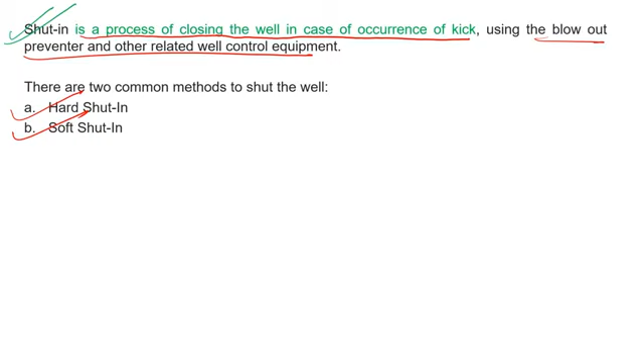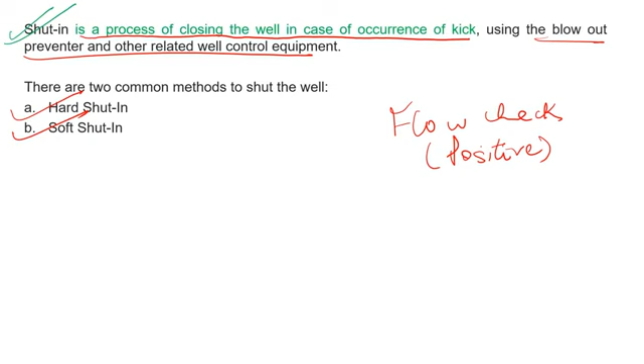There are two common methods to shut the well: hard shut-in and soft shut-in. Once confirmed by a flow check, if my flow check is positive, then I should go for a shut-in. Whether to go for a hard shut-in or a soft shut-in depends on the company's policy and the API specifications.

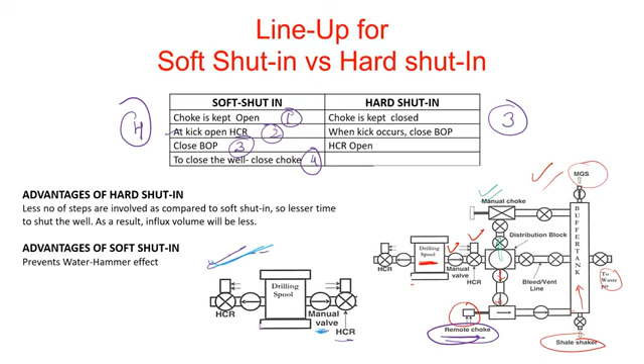Now coming to hard shut-in. The very first point is we have to keep the remote choke closed. Second, when the kick occurs, that is when the well has taken the kick, we close the BOP. Third, after closing the BOP, we need to open the HCR valve. So these are the 3 procedures involved in hard shut-in.

Now, advantages of hard shut-in: as you can see, in hard shut-in I have 3 steps involved, and in my soft shut-in I have 4 steps.

Less number of steps are involved as compared to soft shut-in, so lesser time to shut the well. As a result, influx volume will be less. If I am taking more amount of time to close the well, the influx can enter more into the wellbore, which can result in devastation.

So it is always recommended that I shut the well as soon as possible. If I'm going for a hard shut-in, the overall time taken for the shut-in procedure would be less as compared to that of a soft shut-in.

Now coming to the advantages of soft shut-in: it prevents the water hammer effect. One of the disadvantages of hard shut-in is that there is a high amount of water hammer effect, but in soft shut-in we can prevent that particular water hammer. So that's about the lineup for soft shut-in versus hard shut-in.

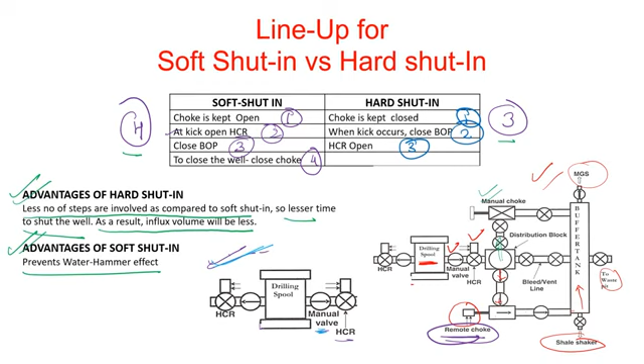Again, it depends on the company whether to go for a soft shut-in or a hard shut-in. Each and every company will have their different SOPs.

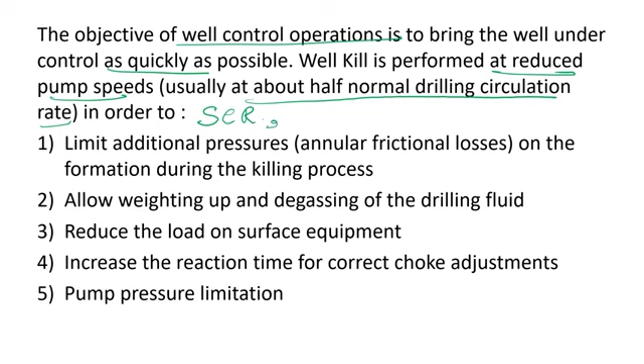Now coming to well killing: the objective of well control operations is to bring the well under control as quickly as possible. A well kill is performed at reduced pump speeds, usually about half the normal drilling circulation rate. This reduced pump speed is generally known as the slow circulation rate, and the pressure corresponding to that is the kill rate pressure. We will discuss these terms in coming slides.

Now why do we go for an SCR or kill rate pressure? To limit additional pressures, like annular frictional losses on the formation during the kill process. Second, to allow weighting up and degassing of the drilling fluids.

If I'm going for well kill with slow circulation rate, I'm giving enough amount of time for weighting up my drilling fluid, and also enough amount of time to degas. For the process of degassing also we are giving enough amount of time if we are going for a slow circulation rate of well killing.

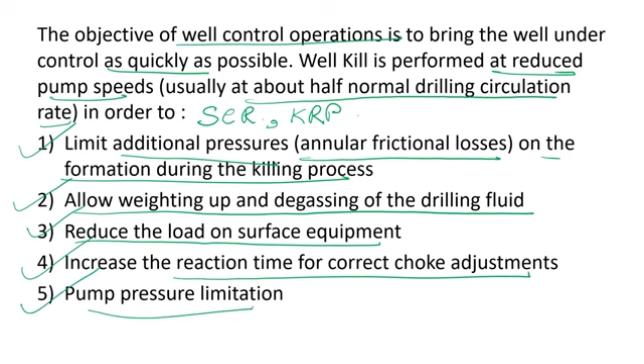Now third point is reduce the load on surface equipment—this is a very important point; by SCR we can achieve reduced load on surface equipment. Fourth point is increase the reaction time for correct choke adjustment. And fifth point is pump pressure limitation. We will discuss these points again in coming slides.

This calculated back pressure is the pressure corresponding to the slow circulation rate, which is also termed as kill rate pressure, or KRP.

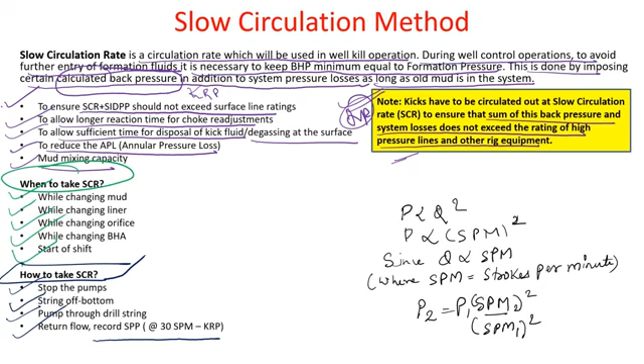So what we do is we first stop the pump and take the string off the bottom. At the off-bottom position I will start the pump and circulate my drilling fluid at 30 SPM, the slow circulation rate. SPM means strokes per minute. So for this particular case, my SCR, slow circulation rate, is 30 SPM.

Once I start my pump, I increase my SPM in steps of 5. I will first run at 5 SPM, then 10, 15, 20, 25 and 30. Till I reach 30, I will increase the strokes per minute of my mud pump, and whatever pressure I'm recording at 30 SPM becomes my kill rate pressure.

Now let's discuss this particular portion. This is a very important portion as far as GATE numericals are considered, so take special note regarding this.

As we know, the mud pump pressure is directly proportional to the flow rate squared. And since the flow rate is directly proportional to the strokes per minute, we can also say that pump pressure is directly proportional to SPM squared, where SPM is strokes per minute. Since pressure upon SPM squared is constant, from that logic we can calculate: P2 equals P1 into SPM2 squared upon SPM1 squared. This is a very important concept for GATE.

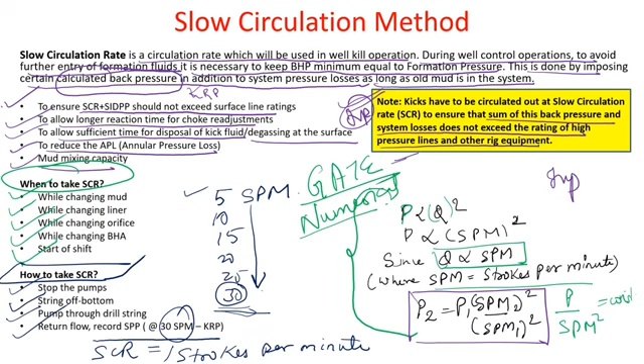Now let's discuss well killing methods. The very first point, whenever we discuss well killing, the principle of well killing is to keep the bottom hole pressure constant, and it should be at least equal to the formation pressure. This is a very crucial point to understand before we talk about well killing.

Now coming to types of well killing, there are basically two types: one is circulating in nature, the second is non-circulating. In circulating we have the driller's method and the wait and weight method, and in non-circulating we have volumetric and bullheading.

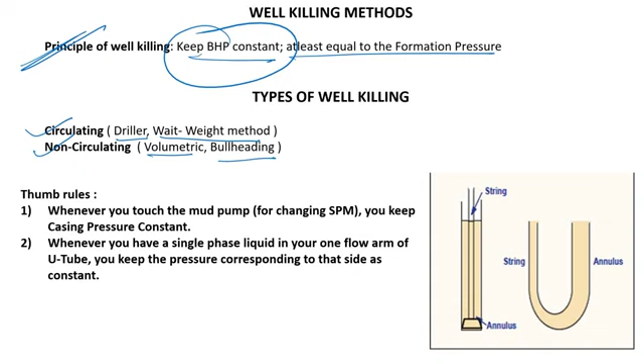Now coming to the thumb rules, again a very crucial point. Whatever thumb rules I discuss, I will use this concept in the coming slides. When I'm discussing driller's method, wait and weight method, and volumetric method, I will use these thumb rules there also. So take special note and please understand at this point.

So the very first thumb rule is: whenever you touch the pump to change your SPM, you keep casing pressure constant. Changing SPM means, as I mentioned, once my pumps are off, to reach the SCR (slow circulation rate), I will increase my strokes per minute of the pump by 5: 5 SPM, 10, 15, 20, 25 and 30 SPM. So basically I am increasing my pump speed.

Whenever I am touching the pump, or trying to increase or decrease the pump speed, at that time I will always consider my string and my annulus as two different arms of a U-tube. The left hand side is the drill string's arm of the U-tube, and the right hand side is the annulus side. The pressure recorded at the annulus side is my SICP, the casing pressure, and the pressure recorded at the string side is my SIDPP, the shut-in drill pipe pressure. Let me repeat it again.

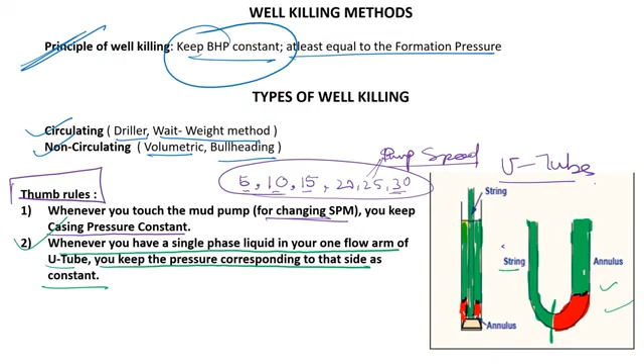Now you can see from this diagram that my drill string side has single phase fluid, but my annulus side of the U-tube has two different fluids: one is the kick, shown in red, and the other is the original drill mud. So two different fluids in my annulus side, but only single phase fluid in my drill string side. Let this be my SIDPP.

So whenever I am having one fluid in one of the arms of my U-tube, I will always keep that side's pressure constant. In this example, I will keep my SIDPP constant, because my string side of the U-tube has only single phase fluid, but my casing or annulus side has two different fluids, in the form of kick and drilling mud. Got it? So that's the two thumb rules I wanted to discuss, a very important concept that we would be using throughout well killing discussions.

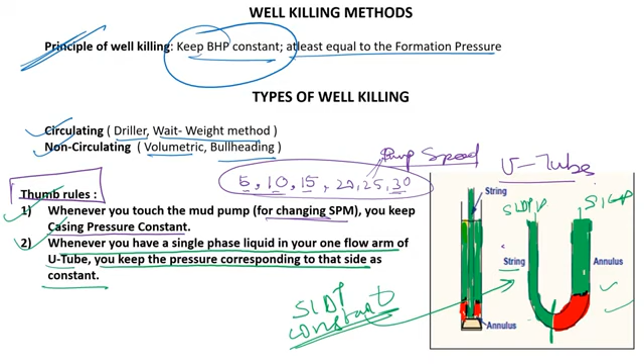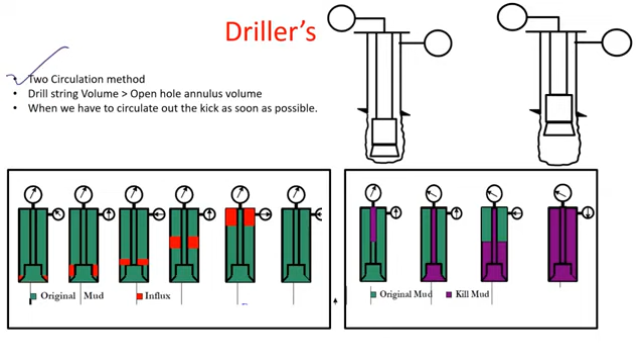A very important method, the two circulation method. Drill string volume is greater than open hole annulus volume, only in that case we will go for driller's method. And when we have to circulate out the kick as soon as possible, at that time we will go for driller's method. I will discuss all three points in detail.

Now coming to the two circulation method, as we can see from this diagram. This diagram is for the first circulation, and this one is for the second circulation. The dark green color represents original mud weight, red color represents influx. The original mud is shown by dark green, and this violet color indicates kill mud.

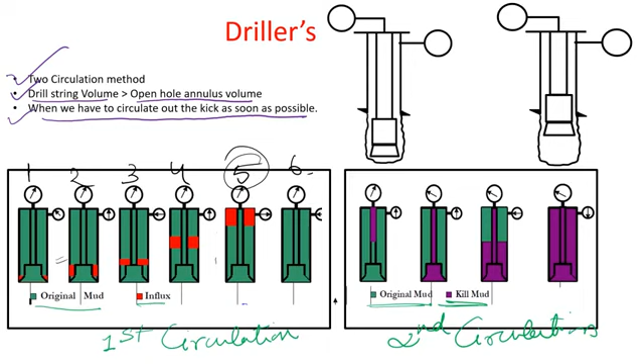You can see that my well has taken a kick, shown across diagrams one through six. In the first case, the well has taken a kick shown as red influx. In the second diagram, the kick is going up. In the third diagram, the kick has moved above the bottom hole assembly and is slowly going out. In diagram five, the kick has reached the surface, and in diagram six, the kick has gone out.

In the second circulation, shown across diagrams one through four, in diagram one I have now started pumping heavy mud, or kill mud, shown in violet, from the drill string. In point two, the kill mud has reached the bit, or the bottom of the well. In point three, the kill mud has started occupying the space of the annulus, and in diagram four, the kill mud has entirely occupied my well.

So after the first circulation, at this particular point, my well has not yet reached the overbalance condition. So if I begin drilling after this first circulation, there are chances that my well may again undertake a kick.

So what I do in second circulation is I start to circulate kill mud through my system, so that once I fill the entire wellbore, that is the drill string and the annulus part, with my kill mud, then and only then I can get overbalance condition. And once I have the overbalance condition, I can go for normal drilling operations.

That's the first point of the two circulation method. Now the second point is my drill string volume should be greater than the open hole annulus volume. This green part I'm highlighting is the open hole annulus volume, and this yellow part is the drill string volume. So the driller's method is only applicable when my drill string volume is greater than the open hole annulus volume. Why this? I will discuss that in the coming slide when I'm discussing the wait and weight method, at that time in detail.

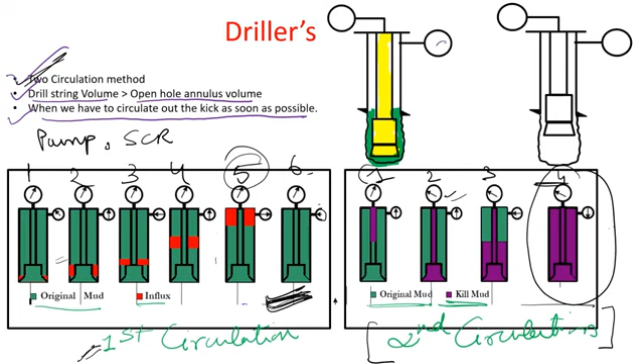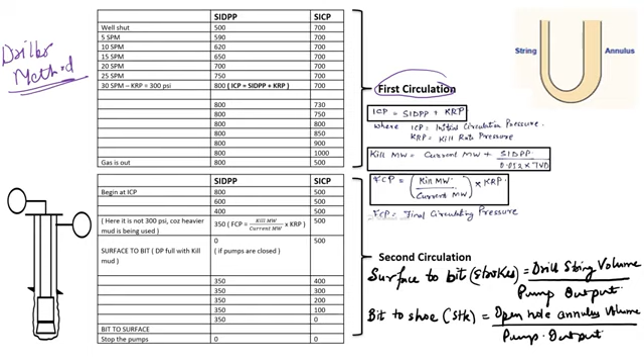In this particular diagram, this will be my SICP reading and this will be my SIDPP reading. So this is the chart, or the recording, that I obtained while performing a driller's method in a particular well. This part is the first circulation, and this part of the table is for the second circulation.

Alright, now let's begin the well killing. At the initial stage, my well is shut. When my well is shut, my SIDPP is 500 and my SICP is 700. So when my well is shut, at that time SIDPP is 500 and SICP is 700.

As you can see, I am trying to increase my pump speed by 5 SPM increments: 5, 10, 15, 20, 25, and 30. 30 is my slow circulation rate. So I am trying to increase my pump speed. Remember the thumb rule: whenever I am trying to increase my pump speed, or whenever I am touching my mud pump, I will always keep my casing pressure constant. So you can see I kept my casing pressure constant throughout.

It is 700 from the beginning, but my SIDPP is getting increased. When I reached 30 SPM, the corresponding pressure I obtain is my initial circulating pressure, ICP. So my initial circulating pressure will be equal to my SIDPP plus my kill rate pressure. When my SIDPP was 500 initially, I can get my kill rate pressure as 300. Now my pump is pumping the drilling fluid at 30 SPM, which is my slow circulation rate.

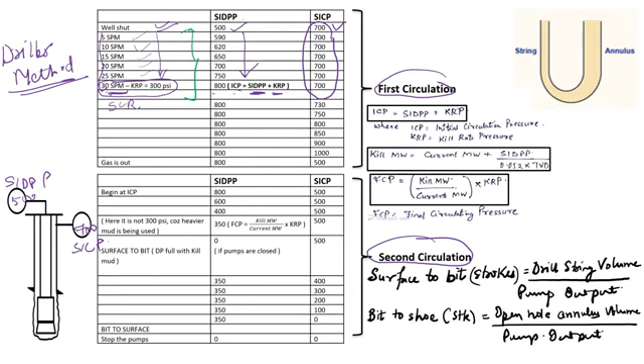Now let's go to this particular U-tube diagram. At the end of this point, what would be my condition? You can see that my annulus has two different fluids, the kick and the original mud, while my string has only one type of fluid.

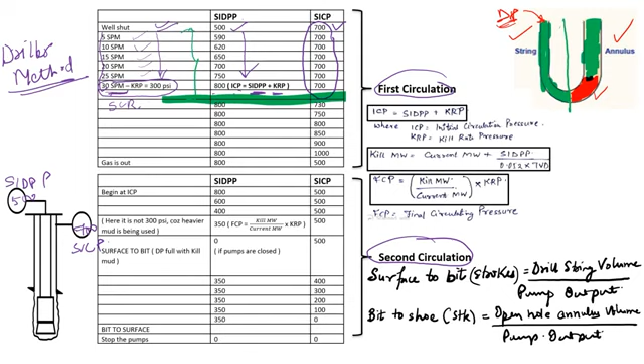At this point, I keep my drill pipe side pressure constant because I have only a single phase fluid in that particular string. So you can see from the chart, I have kept my drill pipe pressure constant at 800 throughout.

You can see that my casing pressure is rising, and once it reaches 1000, it then goes to 500. This means that when my SICP was 1000, my kick has reached the surface, and once the kick goes out of the surface, my casing pressure will go down to 500. The beginning of the second circulation will have my SIDPP of 800 and my SICP of 500.

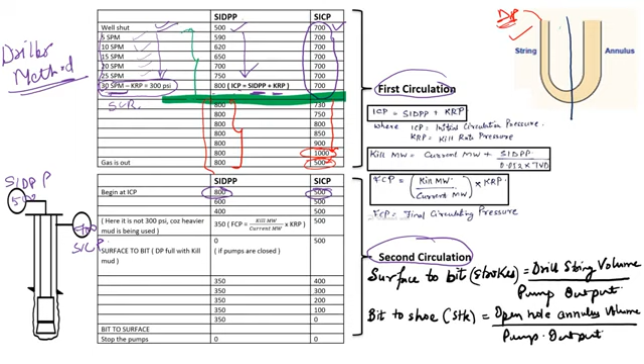Alright, so let's now change my U-tube diagram. Now you can see that my entire string, at the end of the first circulation, will be filled with mud, the original mud. Both the annulus side as well as my drill string side is filled with the original mud.

Now you can see that what I'm doing at this point is I will start pumping kill mud through the system. SIDPP is going down. As we all know, when heavy mud enters into the system, my overall pressure will decrease, and my shut-in pressure will go down obviously because heavy mud has entered the system. Since heavy mud has entered the system, you can see that my SIDPP is going down. Let's see.

ICP, at this point, at the beginning of ICP, I have two different fluids in my wellbore, in the string side. When I have two different fluids in particular, I won't keep that pressure constant. Rather, I will keep the annulus side's pressure constant.

So you can see from this table, I'm keeping my casing side's pressure constant to be 500 throughout, because my kill mud has now entered into the drill string. From the drill string till it reaches the bottom part, I will keep my SICP constant.

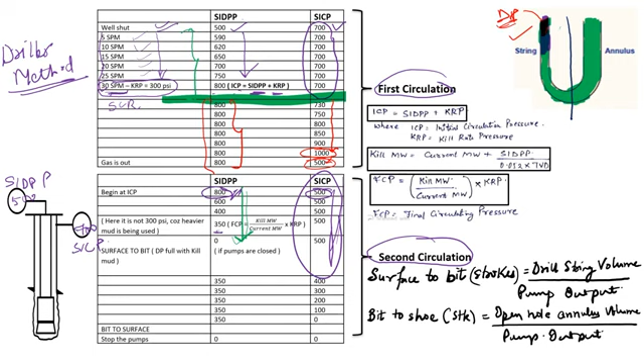As I mentioned, whenever I'm changing the mud, at that time my kill rate pressure will also change. In the slides where we were talking about slow circulation rate, we told that whenever we are changing the mud system, the slow circulation rate will change and the corresponding kill rate pressure is also going to change. So my KRP, my kill rate pressure, has now increased to 350 psi.

350 psi is my final circulating pressure, and if you want to calculate final circulating pressure, it will be equal to kill mud weight divided by current mud weight into kill rate pressure.

At this point, surface to the bit, my kill mud has reached till the bottom part. That means till the bit, my kill mud has reached from the drill string.

I think I can now change the diagram. So my kill mud has reached till this point.

In this case, once my kill mud reaches till my bit, now I have single phase fluid in the drill string side. So I will keep my drill string pressure constant at 350.

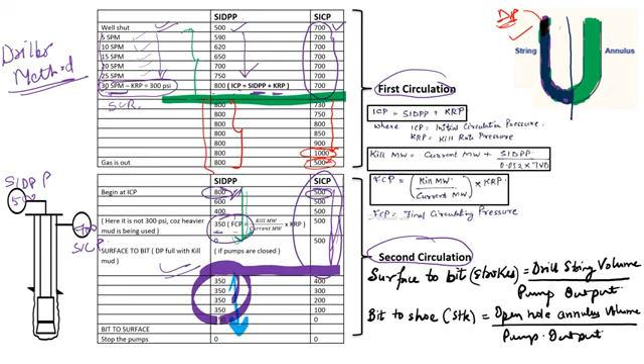Look here, my casing pressure is going down because now the kill mud has entered into the casing side of my U-tube. So I have two different fluids in my U-tube. That's why my pressure is changing.

And why is my pressure decreasing? My pressure is decreasing because the kill mud, being heavier in nature, will always try to reduce the shut-in pressure.

This procedure continues till I get 0. That means after completing pumping the entire kill mud till the surface, and after that when I stop the pump, I will record SICP and SIDPP both equal to 0. At that time I can conclusively say that I have successfully killed the well. I have brought back my primary well control, and now I can open the BOP and drill further.

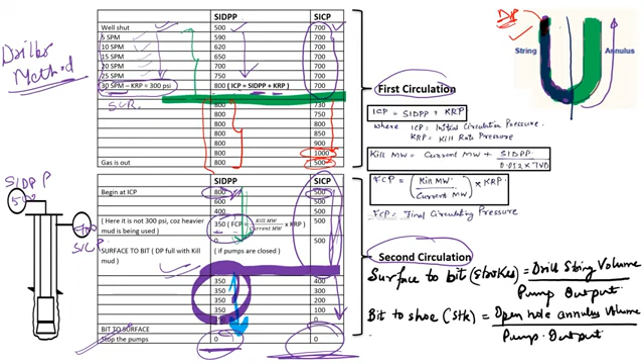Let's talk about some new formulas over here, which is very important as far as GATE numericals are considered.

So ICP is equal to SIDPP plus kill rate pressure, where ICP is initial circulating pressure and KRP is my kill rate pressure.

If I'm told to calculate what would be my kill mud weight, it will be equal to my current mud weight plus SIDPP divided by 0.052 into TVD. Again, a very important concept, and I think questions have been asked from this particular formula.

Now talking about final circulating pressure, it will be equal to kill mud weight divided by current mud weight into kill rate pressure. Someone asked me to find out what is the strokes involved when you are pumping the fluid from surface to bit.

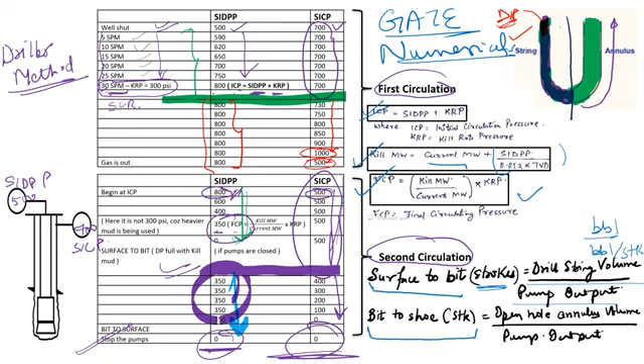Now similarly, if someone asks what would be the strokes involved for the pump to circulate my drilling fluid from the bit to the shoe, that would be open hole annulus volume divided by pump output.

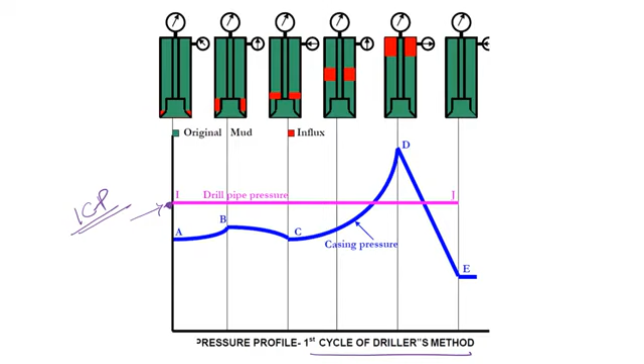As we know, ICP is equal to SIDPP plus kill rate pressure. Let this be point A, B, C, point D, and point E.

At point A in my well, the kick is present in the annulus side, and I am slowly pumping the drilling mud at slow circulation rate, at 30 SPM. You can see that my kick is going upwards. I am keeping my drill pipe pressure constant because I have only single phase fluid in my drill pipe side, so I keep it constant throughout.

My casing pressure is rising as I go from point A to point B. The reason is at point B my kick has reached the annulus of the bottom hole assembly, and as we all know, the clearance at the bottom hole assembly is very less, so that's why I see a spike in my casing pressure.

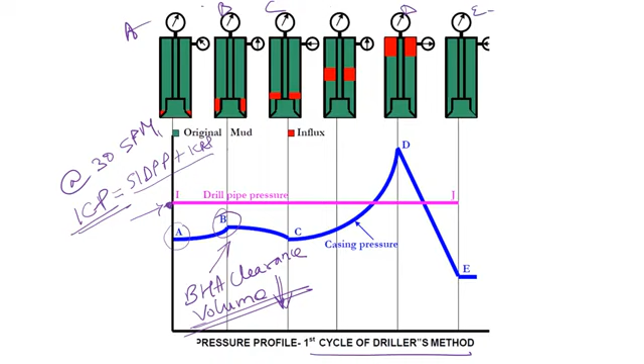At point C, my kick has now gone above the bottom hole assembly, so there is a drop in my casing pressure, because above the bottom hole assembly my clearance is more. As the kick moves up and takes the journey till point D, where point D means my kick has surfaced, I can definitely see a rise in casing pressure.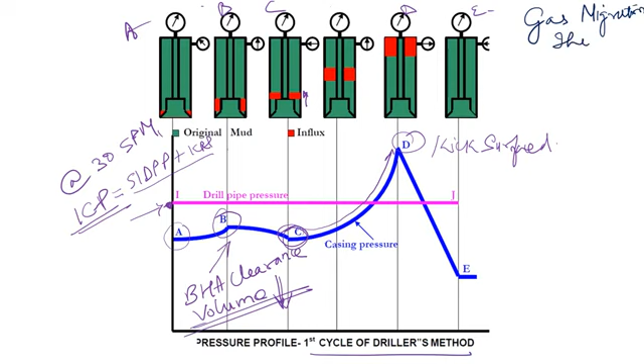This follows the gas migration theory in a closed well. As we all know, in a closed well, when gas migrates upwards, the casing pressure rises. That same concept is reflected over here.

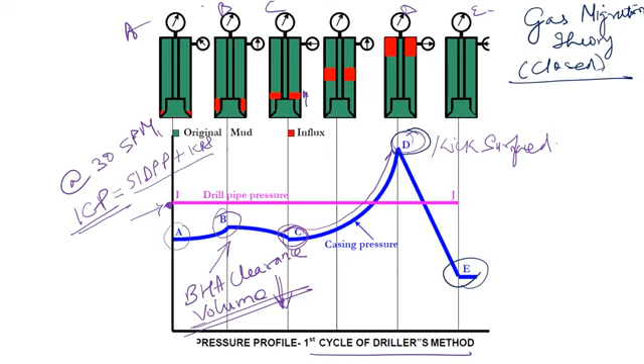At point D, you can see my casing pressure has gone very high, and my kick has surfaced. At point E, I have removed my kick out of the system by using the original mud only. I have not pumped any kill mud at this point.

So this is my first cycle of driller's method. Now let's discuss the second cycle of driller's method.

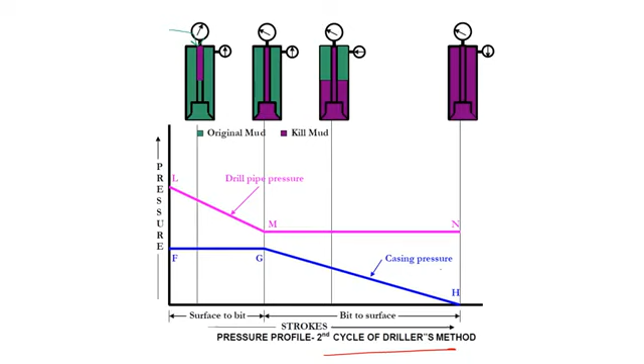Again, the blue line indicates casing pressure and the pink line indicates drill pipe pressure. Now, when I am pumping my kill mud through the drill string, I have two different fluids in my drill string side. That's why I will keep my casing side pressure constant. But since I have two different fluids in the drill pipe side, according to the concept, I won't be keeping my drill pipe pressure constant.

The pressure is going down. Why is my drill pipe pressure going down? Again, when kill mud enters the system while well killing, my shut-in pressure will go down, because kill mud, being heavier in nature, will always try to bring down the shut-in pressure.

This point M indicates that my kill mud has now reached till the bit. The entire drill string is filled with my kill mud, so I have single phase fluid in my drill string. After point M, I will keep my drill pipe side pressure constant.

My SIDPP I kept constant, and when my kill mud enters the annulus of the wellbore, there are now two different phases of fluid in the annular side of the wellbore, that is my kill mud and my original mud weight. Since it has two different fluids, I won't be keeping casing pressure constant, and you can see there is an obvious decrease in the casing pressure, for the same reason.

When the kill mud enters the system, the shut-in pressures will go down. At this particular point, you can see that my casing pressure has gone to 0, and my drill pipe pressure is equal to my FCP. This straight line of drill pipe pressure is my final circulating pressure.

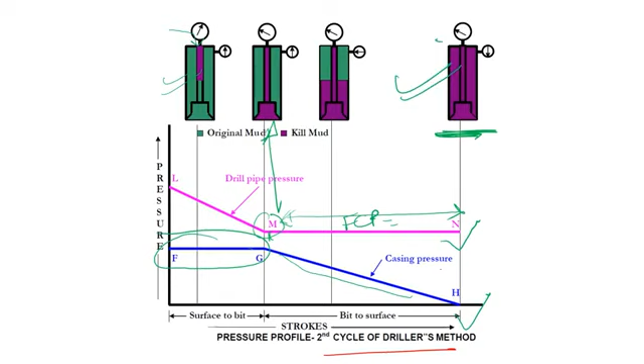At this point, if I am now stopping the pump, and if I am getting my SIDPP equal to SICP equal to 0, then I can say that my well killing is a great success, and I have achieved the overbalance condition.

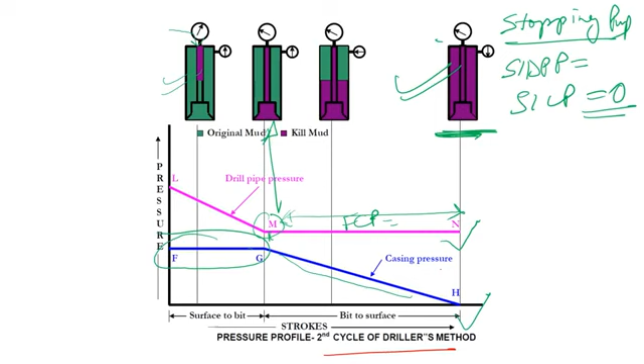Now let's discuss the advantages and disadvantages of driller's method. As we all know, it is simple to understand.

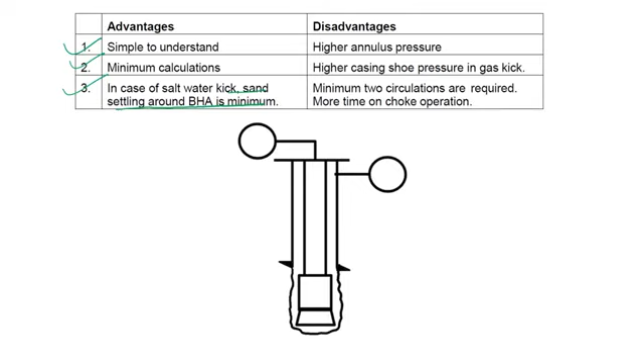Minimum calculations are involved, and in case of salt water kick, sand settling around the bottom hole assembly is minimum. This is because I am doing this in a very quick manner. The entire process occurs in a very short span of time, which is why sand settling around the bottom hole assembly is minimum.

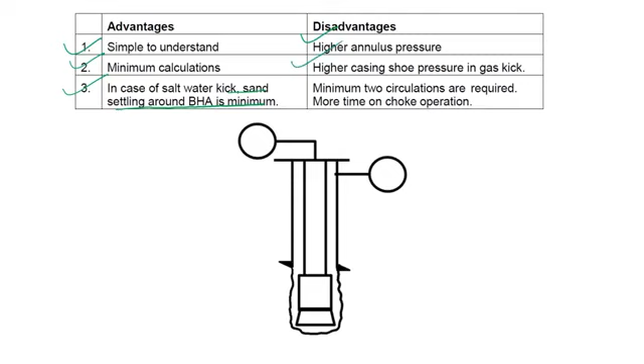Now the disadvantages are: higher annular pressure, higher casing shoe pressure in gas kick, a minimum of 2 circulations are required, and more time on choke operation.

Let's discuss the wait and weight method. It is a one circulation method.

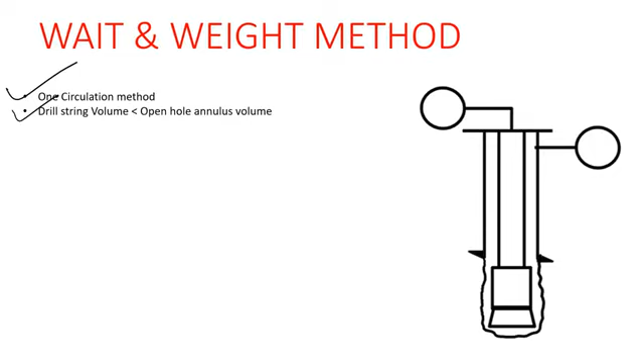It is a one circulation method, and it is only used when my drill string volume is less than the open hole annulus volume. That means when the drill string volume is less than the open hole annulus volume, only then is this particular wait and weight method of well killing applicable. We will see why this particular case is applicable for wait and weight in the coming slides.

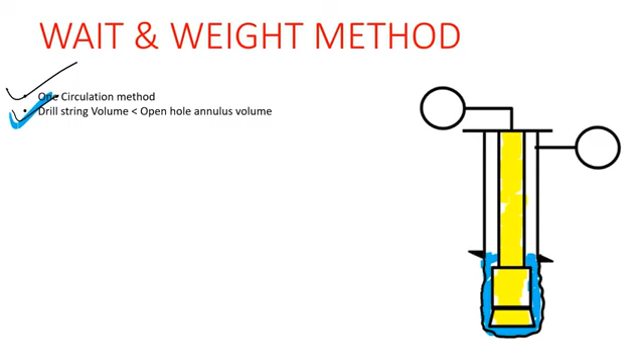Since I have mentioned that it is a one circulation method, recall that when we were discussing driller's method, in the first circulation we were circulating out the kick to the surface using old mud, the old drilling fluid. Then in the second circulation we were using kill mud to bring the well back into an overbalance situation.

But in this case, in my wait and weight method, I am injecting or pumping the kill mud at the initial stage only. That means when my kick is in the annulus, at that time only I am pumping my kill mud. That's why it is termed a one circulation method.

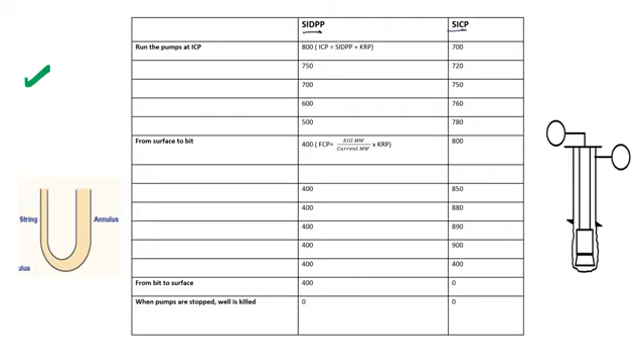All right, now let's see this table. This table shows us the readings for the wait and weight method, where you can see that my SIDPP and SICP have been recorded. As we know, this would be my SIDPP on the drill pipe side, and on the casing side my SICP will be recorded.

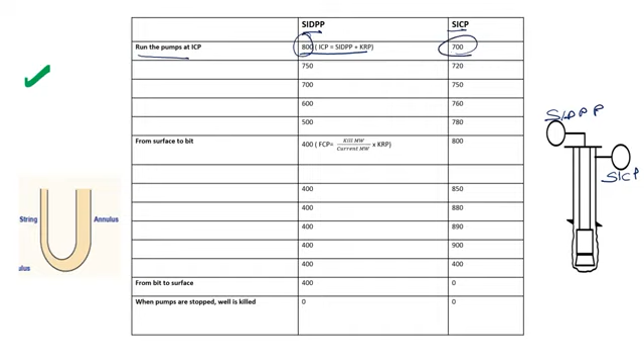Now run the pumps at ICP, the initial circulating pressure. My SIDPP would be 800 and SICP is 700. Again, the same process we followed in driller's method, where we were increasing my pump SPM by 5 units - 5, 10, 15, 20, 25, 30 - and 30 was my SCR or slow circulation rate, and the pressure associated with it was my kill rate pressure.

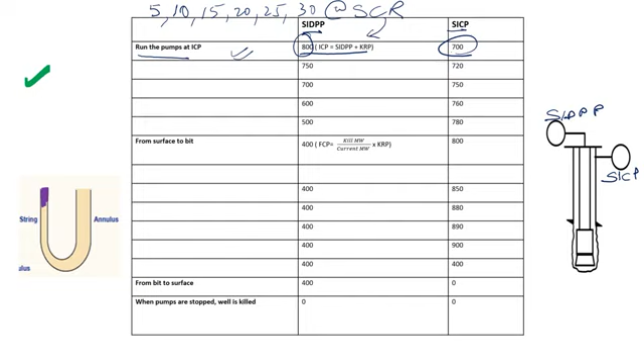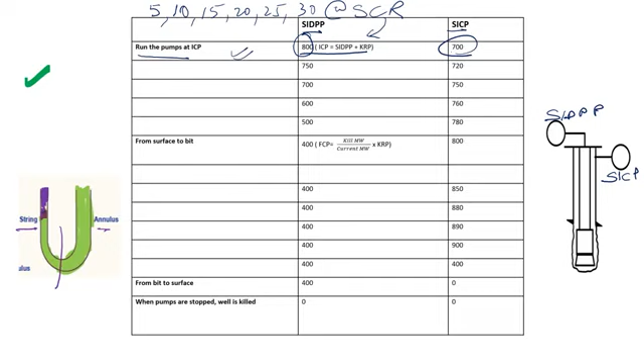I've started circulating. You can see in this diagram this is my string side and this is my annulus side. Let this green color be the original mud, the violet color be the kill mud, and let this red color be the kick.

Now you can see that when I started my SIDPP at ICP, or initial circulating pressure, from this particular point I have started pumping kill mud. You can clearly see that as I am pumping the kill mud into the system, my SIDPP is going down. And on the other hand, in the annulus side where my kick is there, you can see that the pressure is getting increased.

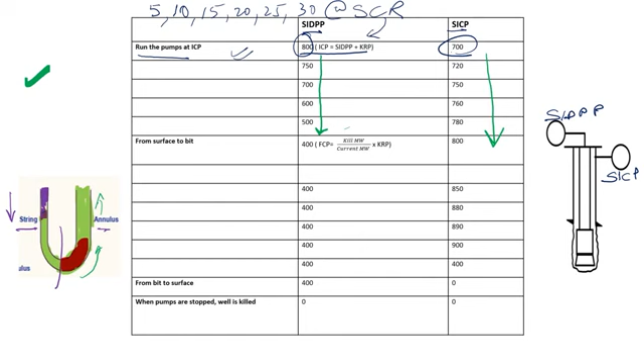Okay, so as this particular kick goes upwards, my shut-in casing pressure increases, and on the drill string side, as the kill mud is filling the drill string, at that time you can observe that my SIDPP is going down. Now let's discuss that same thing graphically.

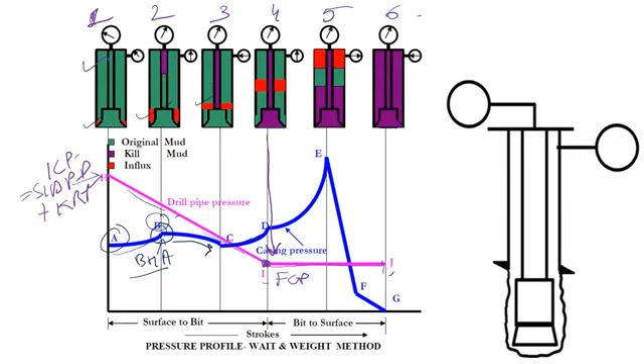Now from point C to D you can see, as the kick goes up my casing pressure is rising. Now at point D, this is a very crucial juncture. At this point D you can see that above this point my kill mud has also started entering into the annulus.

So at this point you can see that my slope of increase of casing pressure - if my kill mud was not entering, then the slope should have been this. But since my kill mud has started entering the annulus system, you can see that my slope of the casing pressure has reduced, because the kill mud has entered into my annulus system, and because of that the rate of increase in shut-in casing pressure has now reduced.

Now at point E, my kick has surfaced to the surface. And after that, at point F, I have completely removed my kick out of the system, and point G means I have achieved my overbalance condition. Got it? Okay, so this is how you graphically represent the wait and weight method.

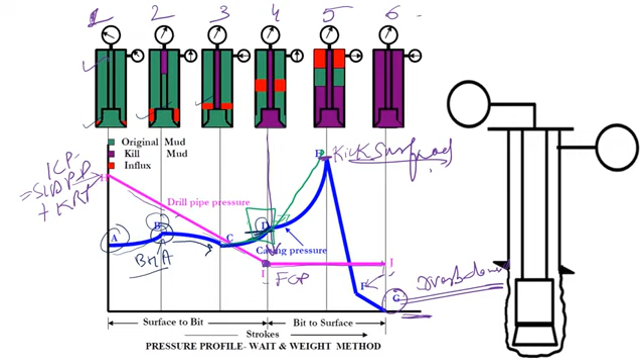Now again there is a well over here, this is the casing seating depth, and let this be the drill string volume, let this be the drill string, this is the bit. Now I've discussed a few times,

I've discussed various times that when my open hole volume is greater than drill string volume, at that time the wait and weight method is feasible.

The reason over here is that when my open hole volume is greater than drill string volume, at that point if I am looking at the position of my kick, then you can say that my kick would have been below the casing seating point. In this particular case, where my open hole volume is greater than drill string volume, the kick would have been beneath the casing seating depth.

And we all know that my casing seating depth, whatever depth my casing seating is there, is the least competent formation, and it is most vulnerable to fracture. So that's why you can experience more amount of casing pressure at this point - my casing pressure would be very high if my open hole volume is greater than drill string volume.

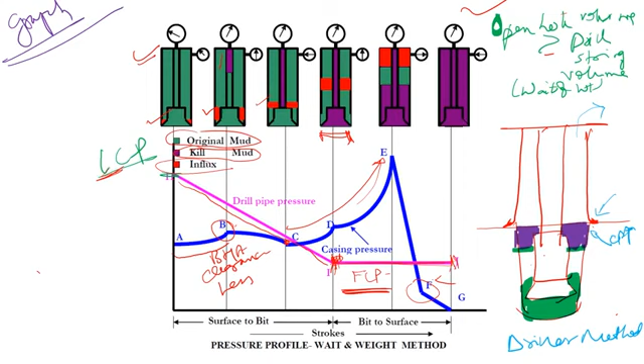As a result, my casing pressure observed in driller's method and in wait and weight method differ. Let's say in driller's method, if I am observing 800 casing pressure, at that time my casing pressure observed in wait and weight method would be, let's say, 500. It would be less. My casing pressure observed would be less in wait and weight method because my kill mud plays the role. My kill mud, because it is heavier in nature, the overall casing pressure observed will be less.

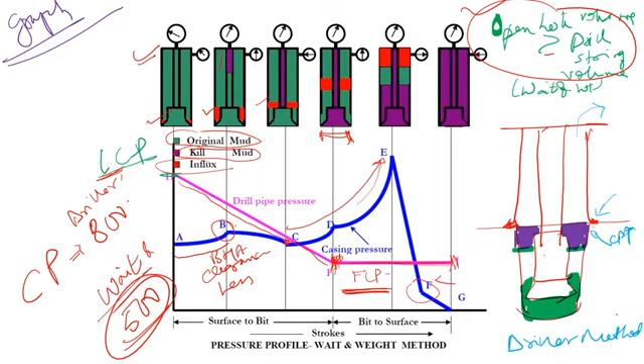As a result, whenever I am having the open hole volume greater than the drill string volume, at that time I will opt for this particular technique of wait and weight method instead of going for driller's method. Now coming to the advantages and disadvantages of wait and weight method.

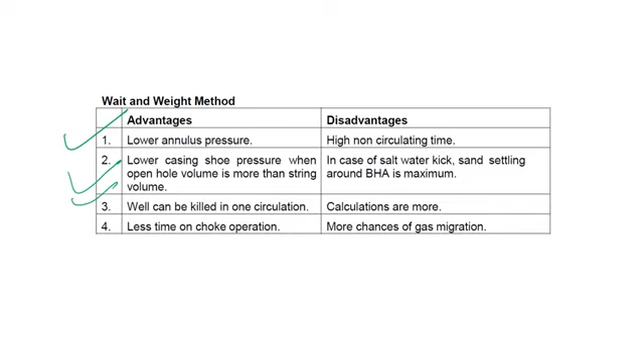Again, low annulus pressure, I have mentioned it. Low casing shoe pressure when open hole volume is more than the drill string volume. Again, I have discussed this. Well can be killed in one operation, in one circulation, and less time on choke operation. It is obvious. And high non-circulating time is there.

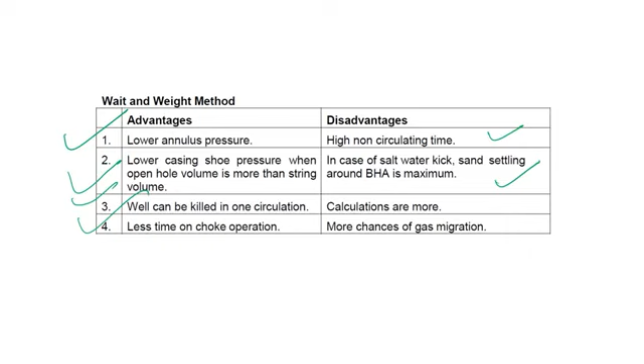This is one of the disadvantages. In case of salt water kick, sand settling around the bottom hole assembly is common, and calculations are more comparatively, and more chances of gas migration.

Let's discuss volumetric method. There are several situations where you cannot circulate through the well. Those situations may be a plugged drill string, a plugged bit, the drill string above the kick, or the drill string out of the hole completely. In these three cases, let's say my well has these issues and unfortunately takes a kick. At that point we have to go for a volumetric method of well killing to get back my well control.

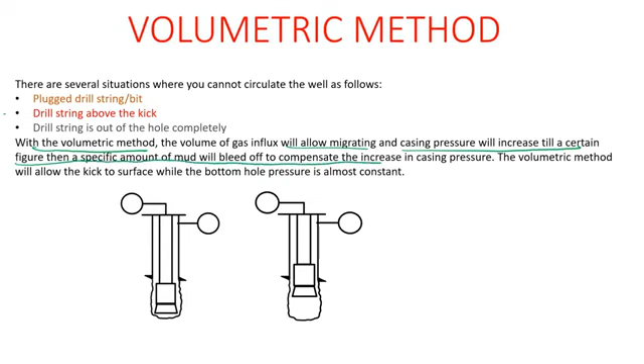With the volumetric method, the volume of gas influx will be allowed to migrate and the casing pressure will increase till a certain figure. Then a specific amount of mud will be bled off to compensate the increase in casing pressure. The volumetric method will allow this kick to surface while the bottom hole pressure is almost kept constant. I will discuss this particular point in the next slide, then you guys will understand it completely.

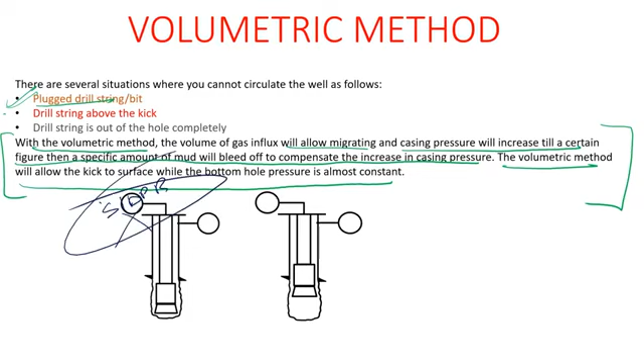So let's look at this particular situation. Let's say my drill string is plugged. In that situation, I cannot pump any sort of drill mud through my drill string, because since it has been plugged or choked, I cannot pump my kill mud or drill fluid through the drilling side. Plus I cannot record anything—my SIDPP won't be recorded. So in that case, I will use a kill line and pump kill mud through that particular line.

Second point is when my drill string is above the kick. Let's say my well has taken a kick, but my drill string is above the kick zone. That means till this particular zone, we need to go for a volumetric method of well control. Once my kick goes above the drill string, then we can go for a driller's or a wait and weight method.

Now the third case is when my drill string is completely out of the hole.

Let's say I have pulled out the entire drill string because I had to change my bottom hole assembly or replace my bit, and during that time unfortunately my well has taken a kick. In that particular situation, we need to go for a volumetric method of well killing.

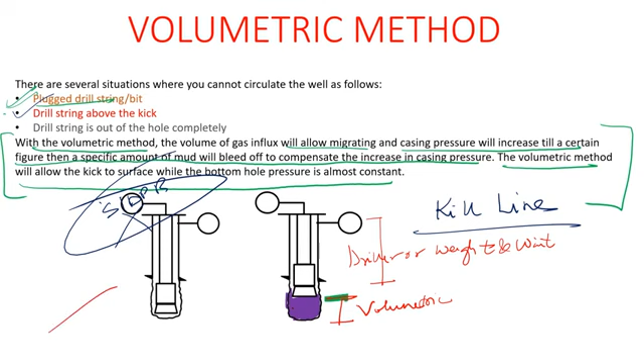Now let's discuss how this volumetric method really works. It works on two principles: bleeding and lubricating. These are the principles we use for volumetric well control. Let's see how this works.

Again this is a pressure versus time chart, and this is the casing pressure versus time. As I said before, I will not get any recording of SIDPP when going for the volumetric method, because my drill string or bottom hole assembly was choked, so I won't get any recording at my shut-in drill pipe side. So I will only be taking into consideration casing pressure for the volumetric method.

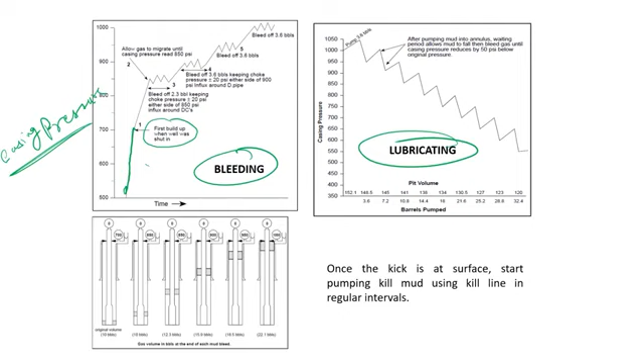Now let's say, looking at this particular graph, you can see that my casing pressure is rising, which means the kick is also rising with time, going up with time. This first point is the first build up when my well was shut in. Now with more time, the kick is moving upwards and my casing pressure is also rising.

At point number 2, we allow gas to migrate until casing pressure reads 850 psi. Now at point number 3, what we do is bleed off 2.3 barrels, keeping choke pressure plus or minus 20 psi. So at point number 3, we start to bleed off some amount of drilling mud from the chokes.

Since I am bleeding off this volume, that means now it is following the gas migration theory in an open well. Since I am bleeding off a certain volume, I am allowing my gas influx, or kick, to expand itself. Because of this expansion of the kick, my overall shut-in casing pressure gets reduced. So you can see that the slope of my casing pressure has now reduced, because I am allowing my gas to expand to a certain point.

So from point 2 to 3, I bleed off 2.3 barrels of drill mud, and at point 3 I again close the choke. After closing the choke, my casing pressure is rising again, but the increase is not as much as before. Now at this zigzag region at point 4, I am again bleeding off certain barrels of mud, this time 3.6 barrels. Because of this bleeding, my gas will again expand, my influx will expand, and my casing pressure will reduce. So I am repeating the same process.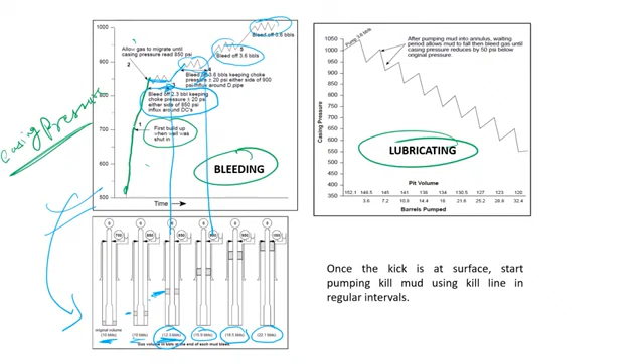Now once my entire kick is out at the surface, what we will do is start pumping kill mud from the kill line. This process is the lubricating method, also called lubrication. So what you do in the lubrication method is, let's look at this point.

Let's start from this point. So from this point I have pumped 3.6 barrels of mud. So when I am introducing heavier mud into the system, my shut-in pressure went down.

Once I pumped 3.6 barrels, I again closed the kill mud line. As a result, my casing pressure rose to a certain extent. Again I pumped 3.6, and my casing pressure rose. I continued this process till my casing pressure went to zero.

So at regular intervals I would be pumping 3.6 barrels of kill mud, so that my shut-in casing pressure will go down. Again, this 3.6 barrels is just an example value that I have taken.

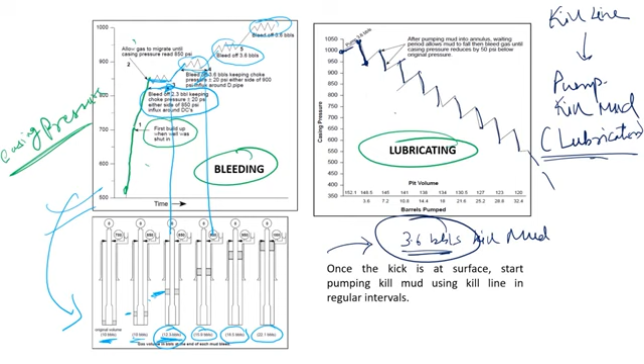Now let's talk about bullheading. The concept of bullheading is to pump the kicks back into the formation by using kill weight fluid.

So when may you consider using bullheading? When the kick size is very big, you may not be able to control the excessive volume coming to the surface. So when my kick size is very large than anticipated, then we should go for a bullheading method.

Second, when there is a possibility to exceed the surface pressure and volume of gas on the surface if conventional methods like the driller's method or wait and weight and volumetric are performed. If there is danger that my gas or kick pressure, the pressure that will be communicated to the surface, exceeds the maximum surface pressure, then there are chances that my surface equipment can get ruptured. In that case we may go for a bullheading method.

Third point: if my influx contains a high amount of H2S or hydrogen sulfide, then we can opt for a bullheading method. As we all know, H2S is a very poisonous gas, and even at low concentration it can be very lethal or fatal to human beings. So at that point also we can go for bullheading.

And fourth point is, when there is no string in the wellbore, at that time also we can consider going for bullheading, and in that particular case we will pump my kill mud through the kill line.

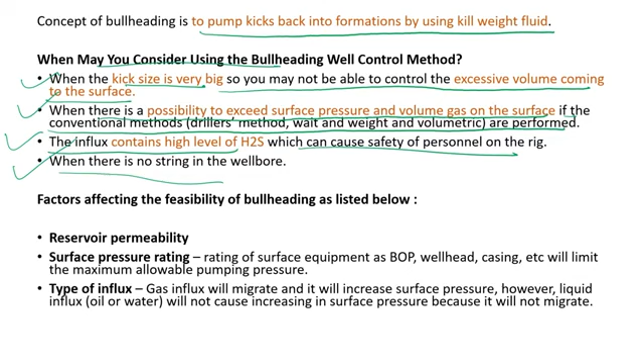Now let's look at the factors affecting the feasibility of a bullheading process. So those factors are: reservoir permeability. Now this is a very important term. If my permeability of the reservoir is high, only then will I consider a bullheading process. The reason is, since the layer has high permeability, if I am trying to pump my kick back into the formation, because of this high permeability my kick will easily go into the formation without fracturing.

But let's say if my formation is very tight in nature, or has less permeability, then if I am trying to pump the kick back into the formation, I may experience higher mud pump pressure or higher back pressure, and my tight reservoir can get fractured. So that's why reservoir permeability is very crucial when we talk about the selection criteria for the bullheading process.

Second point is surface pressure rating. The rating of surface equipment such as BOP, wellhead, casing, etc. will limit the maximum allowable pumping pressure. Point three is type of influx. The gas influx, as we all know, will migrate very rapidly and will increase the surface pressure. However, liquid influx, which can be oil or water, will not cause an increase in surface pressure because it will not migrate.